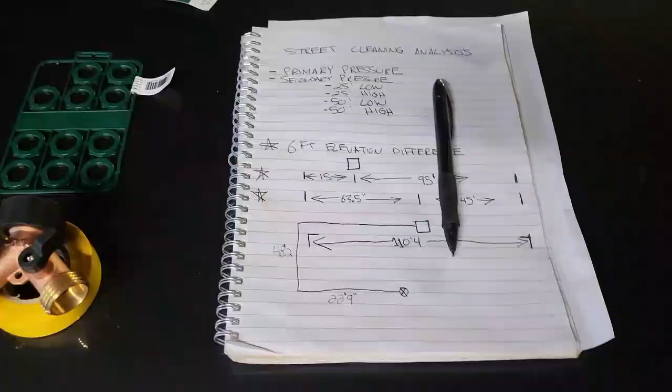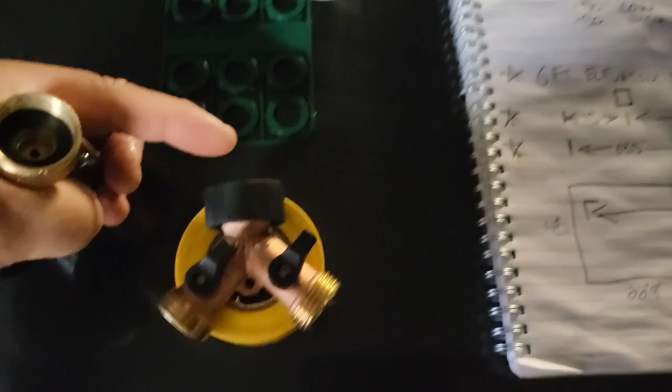Okay, before I start putting everything together, I want to show everybody my garden hoses that I will be using. And as you can see, everybody's probably cringing, saying they're not the right material for a pressure washer and all this and stuff, blah, blah, blah. Carrying on. I bought this gizmo to attach to the garden hoses, which will be connected to the primary. So what will happen is... Oh, that's right. This will be connected right here. This will be free. And then the garden hose will be connected from this to the primary, to the house.

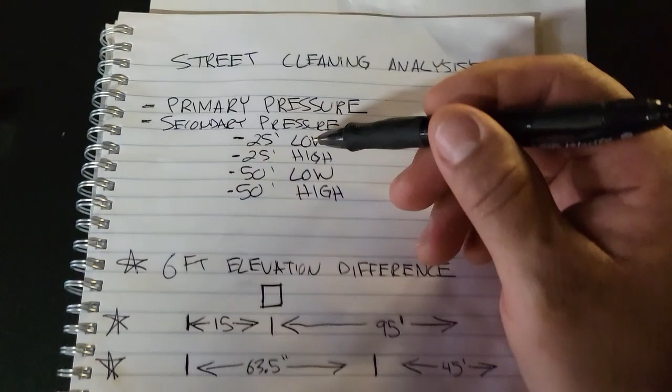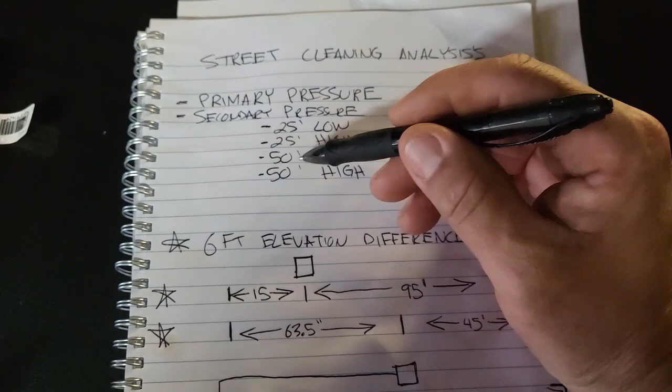Right? And what we're going to do is we're going to take individual readings. So in 25-foot hose for one hose, we're going to put it in the low elevation. Then we're going to put it in the high elevation. We're going to put another garden hose attached to that one, so we have 50 feet in total. And we're going to do the exact same thing. We're going to have 4 readings.

We're also going to do the bucket test of how fast it fills up a bucket. And I don't have any particular way of measuring how much water is in that bucket because there's no tick marks on it. But we do have a tape measure. So we will use our tape measure and we will put it at the top of the water, and we'll take a measurement from the lip right there. And I'm pretty sure we're gonna have different readings.

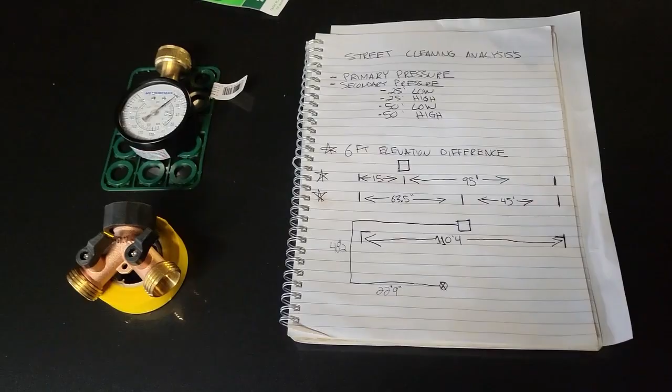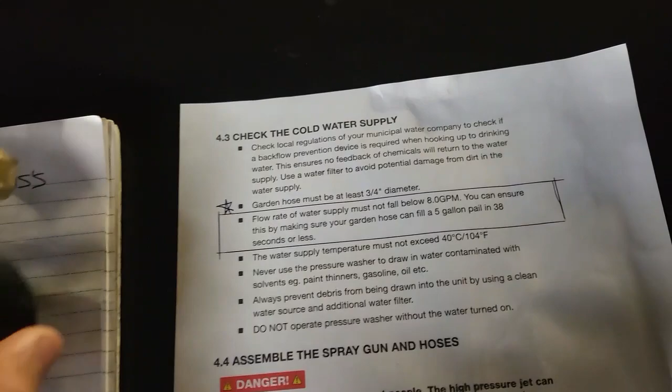Okay, I just went and bought some washers for my garden hoses so that way there's no leaks. So, ladies and gentlemen, having said everything, we're going to put everything into effect right now. So here we go. Before I get started, I wanted to show everybody, see where that star says garden hose must be at least 3/4 in diameter. Okay, so what that means is the garden hose has an inside diameter of 3/4 of an inch. So the water comes through this side to this side is 3/4 of an inch. It does not mean the outside diameter.

And if you look at this here, that inside rubber O-ring is 3/4 of an inch. This part right here is a female end, which is 1.5 inches. And it feeds water through a 3/4 inch diameter tubing of the garden hose. Okay, and the water flowing through those is 3/4 of an inch. Blah blah blah. Let's get to it.

Okay, so now after showing you guys where it is that I'm going to be working, I wanted to show everybody the preparation and planning that I have undertaken to make sure that I have the water pressure needed to feed my pressure washer. So I'm going to show everybody my layout here. I'm going to flip the camera around.

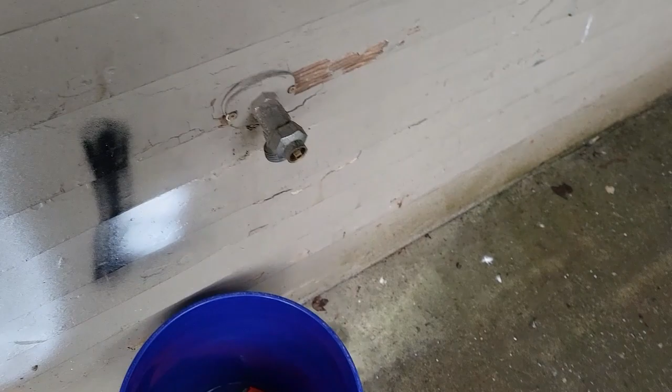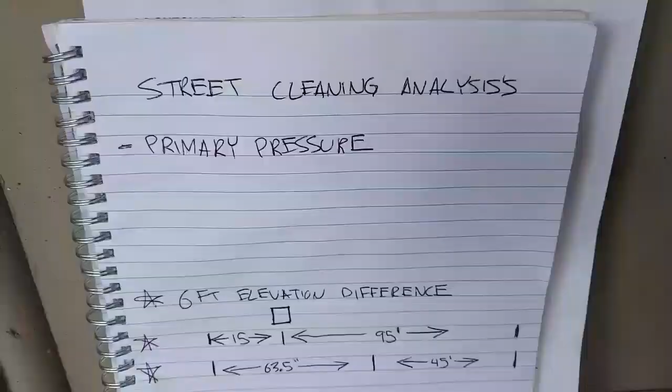As before, you've seen me use this one, this water feed. It does work. Now, I have to feed it from that right there, along here, up this hill, into somewhat the middle of the building. So I want to show you guys some paperwork here. Okay, so this is our layout.

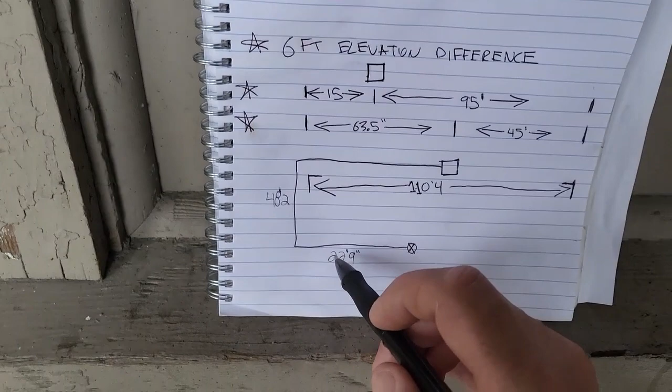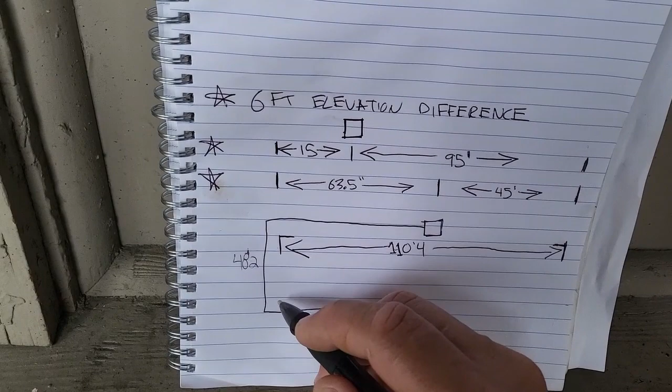On the bottom here, this X represents that hose. It will go a distance of 22'9" to the corner. It goes up the hill a distance of 48'2". Now that does not mean that the corner of the building to this corner is 48'2". That just means the diagonal distance will be traveling 48'2".

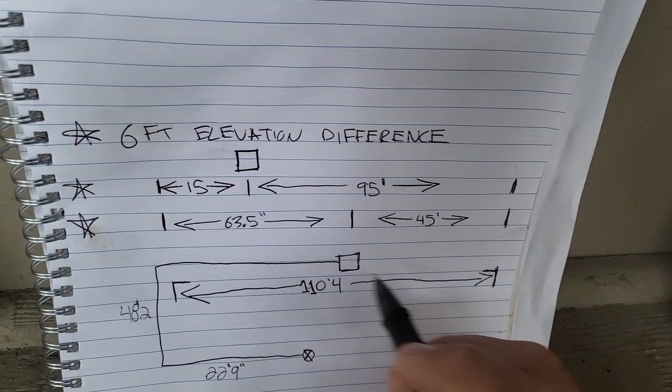Now we have two different measurements here because of the situation that I have. In reality, from this corner to this corner, the distance is 110'4". And a lot of you would say that I would need to put it directly in the middle and use a 50-foot hose so I can comfortably get this and this with a 50-foot hose.

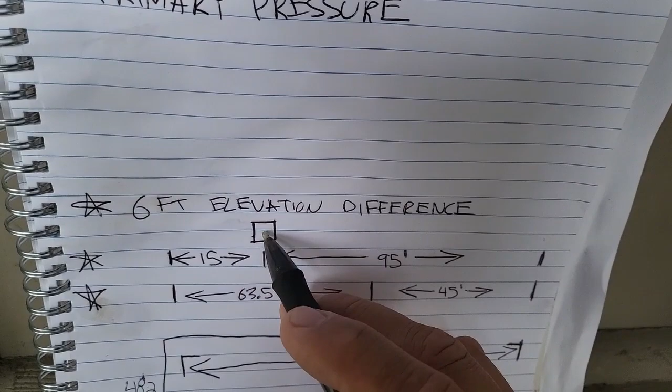So these two drawings, this line represents this corner. This line represents the block here if I was to put my pressure washer there or there, okay? This line represents the other corner of the building. If I was to put my pressure washer here, I would be able to use a 50-foot hose to get up to this corner. All right, and then I would probably just drag this back just so I could get this corner with the hose.

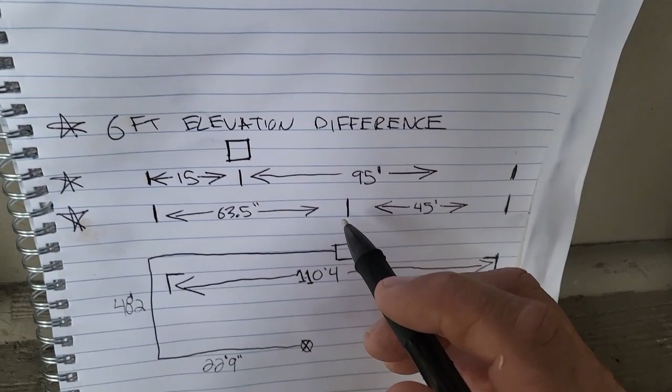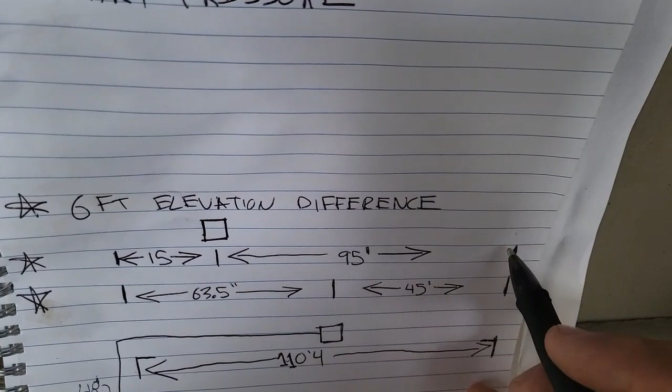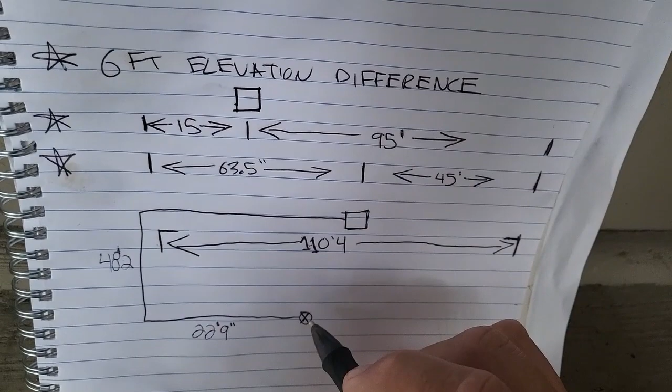But I might be able to have two hoses that are 50 feet each, which means I would have 100 feet of hose, and in which case I would put my pressure washer here, and I could use the full length of the 100-foot hose to reach this corner, which would be 15 feet away, which would mean I would have just a little bit more water pressure from this X, this point right here. Okay, so that's what it is that I'm looking at.

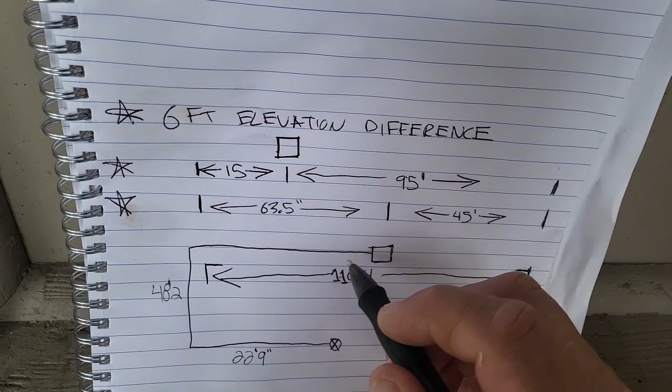We have a 6-foot elevation difference between where this ends up right here and the level surface of the sidewalk where this is. Okay, so now, ladies and gentlemen, what we're going to talk about is water pressure. Let me put this on pause. So from that ShopRite, including the borough, all the way to the alleyway there, that is what I will be working on.

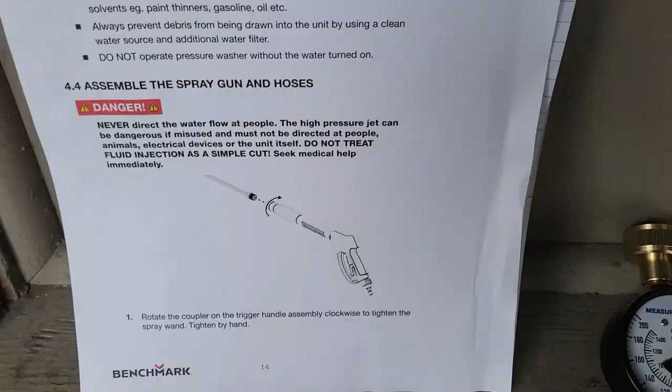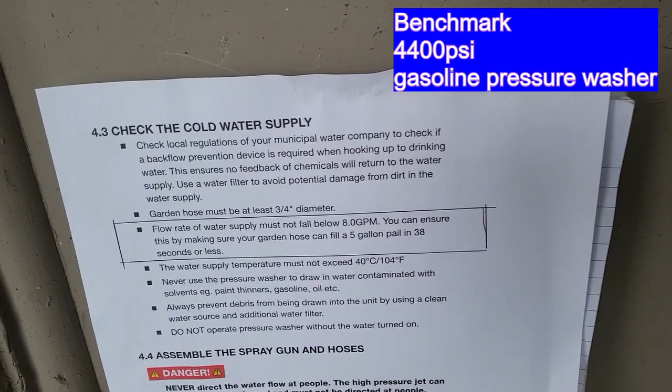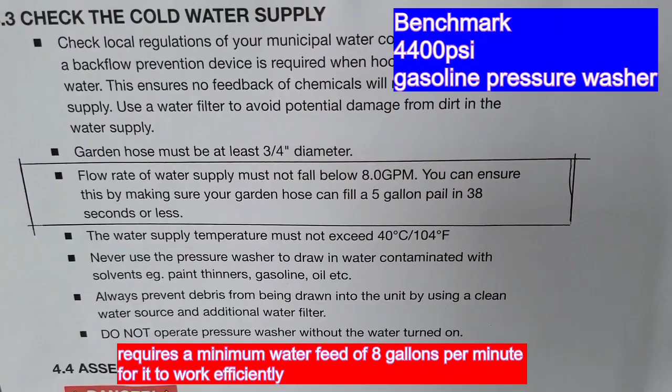Okay, in order for me to know how much water pressure is coming out of here to feed my pressure washer, you all need to know how big my pressure washer is. My pressure washer will be a 4,400 PSI pressure washer, and if you look at this diagram that I printed out for everybody to consider, it tells you your feed. The garden hose must be at least 3/4 inch in diameter, and the flow of water must not be below 8 gallons per minute, and I can fill up a 5-gallon pail in 38 seconds, which is why we have this, an actual 5-gallon pail.

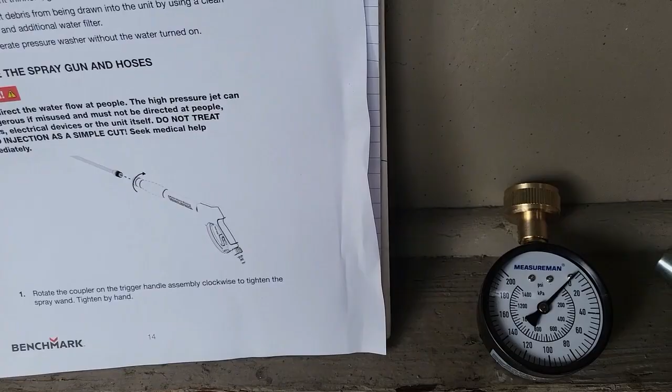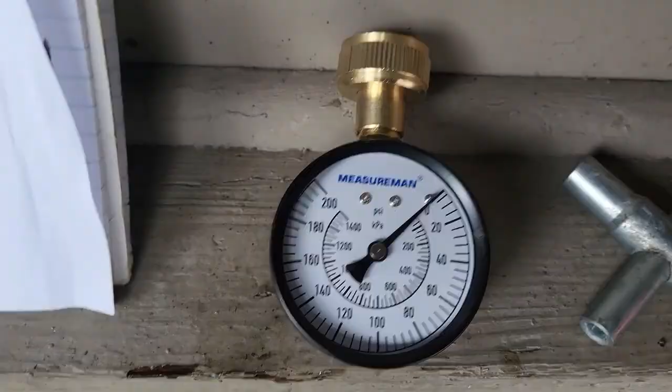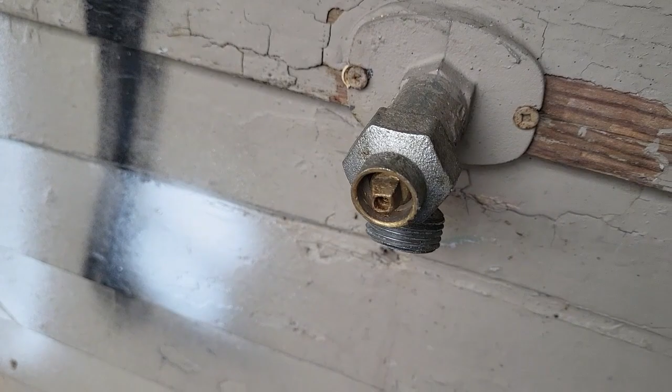Okay, so that's what we're gonna do. We're gonna turn this on, fill that up, and see if we can get it in 38 seconds or less. You see this machine right here? I bought that from Amazon, in fact, so I could check the pressure. And then I'm going to record that, and you're all going to see that. So I'm going to plug this into there. I'm going to use my water key over the little nib right there, and we're going to turn it on and have that reading. So hold on.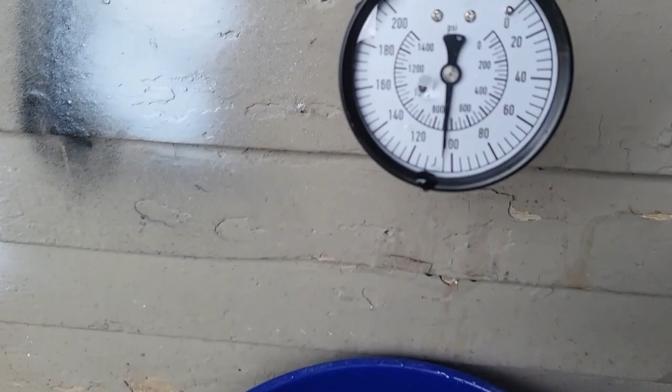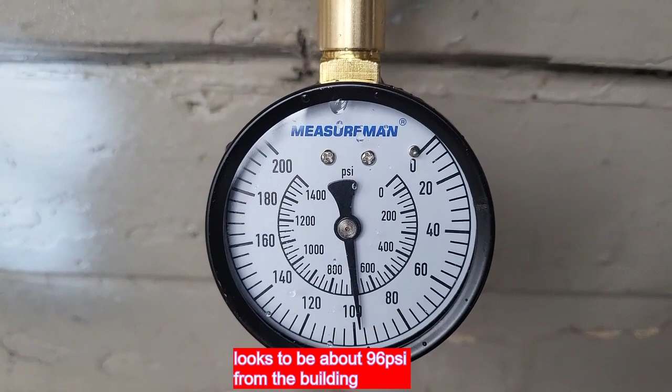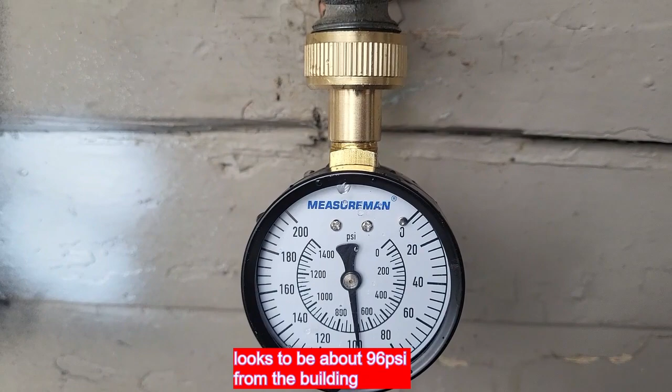Holy effing shit. We have a lot of water pressure there, ladies and gentlemen. Okay, so what I did was I bled that a little bit so there would be no air causing a malfunction with the reading. It should be a solid water pressure, and that's what we have, which means we have a lot. So now I'm going to fill this bucket up to see if we can get that in 38 seconds or less.

I'm about to start. I got my camera dial on video here. I'm going to turn it on full blast. Starting right now.

Okay, that was right there. It was just a little over 38 seconds. It was actually 43, but that's what we have. That's not bad, but according to this, it should be able to fill that in less time. So now what we're gonna do

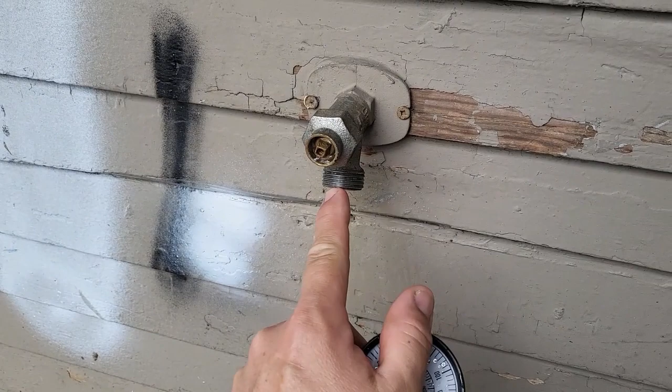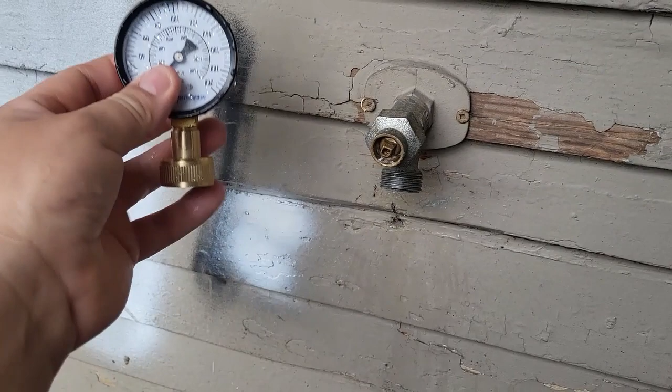is we're gonna put a garden hose from here and connect it to this and see what our reading is. It's gonna be a 50-foot hose. And then we're going to put 2 garden hoses connected to this and then to here, and then we're going to see what the reading is there. Okay, we're going to do 2 different types of readings, and we're going to look at the elevation difference.

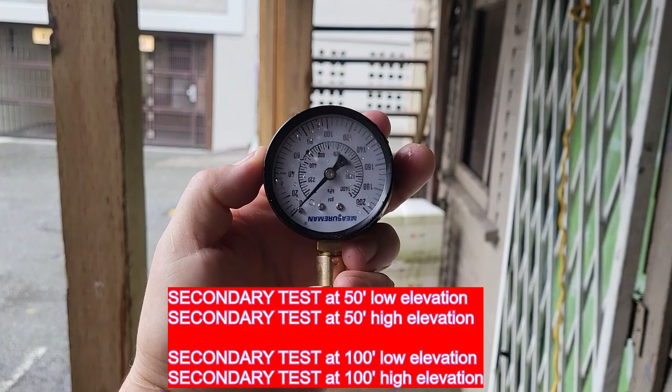So as you can see, the driveway there slopes. You start from uphill here and you go downhill over here. We're going to use both those hoses. We're going to take the reading from over there on 2 separate readings, and then we're going to go uphill and take the 2 separate readings of the garden hoses. And you're going to see that there's going to be different readings, which we're going to record on our paper here. So let me get everything all ready.

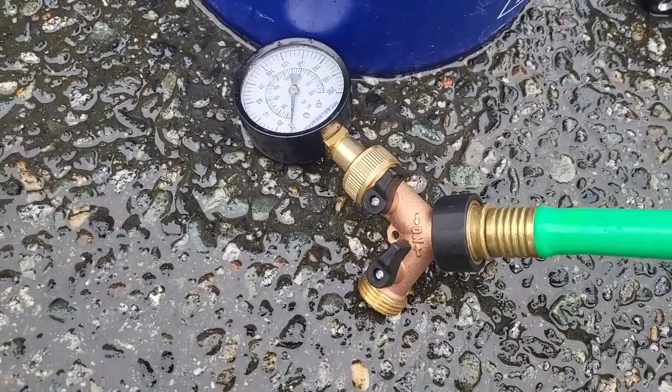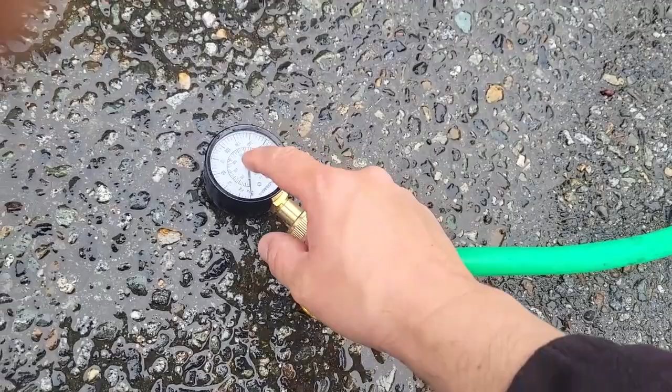Okay, so I'm all set up here. This is the way that's going to be working. This here is locked off. This here is on, which means the water will come on through here, and then I will shut it off here and open it up here, and we will get our reading. So when you are setting up your pressure washer, your hose should have absolutely 0 kinks in it, and it should be as straight as possible.

So what I'm going to do now is I'm going to turn it on, and the water is going to come out through there. When you're doing this, there should be 0 air that is coming out of the hose. It will be sputtering. When you have a complete solid water flow, then you will be able to take a proper reading. There should be 0 air in the hose when you're taking a reading. So I'm going to shut this off.

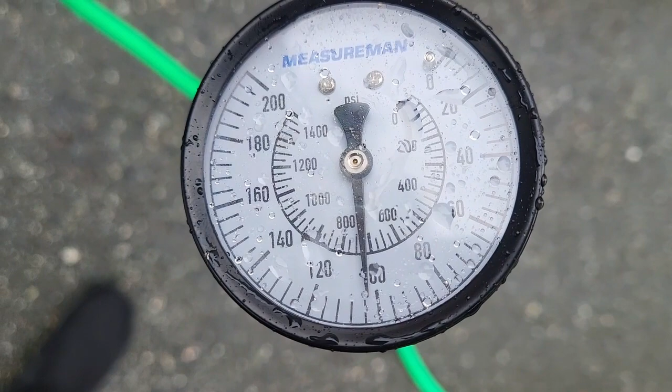Just like that. Then I'm going to turn this on. And there we go. We have a reading upside down of about 100. 110, 105, maybe 105. 2, 4, 6, 8, 10, about 105. Okay? So now what we're going to do is we're going to try to fill this up in the recommended 38 seconds. So here we go. 38 seconds starting now. Hold on.

Six, 7, 8. Okay, there we go. We're gonna take a measurement. Darn it. Okay, so we have a reading of about 4 inches there. Over here, it's about the same. 4. Over there. It's about 4. Okay, so now we're gonna write that down, and then we're gonna do it at a higher elevation.

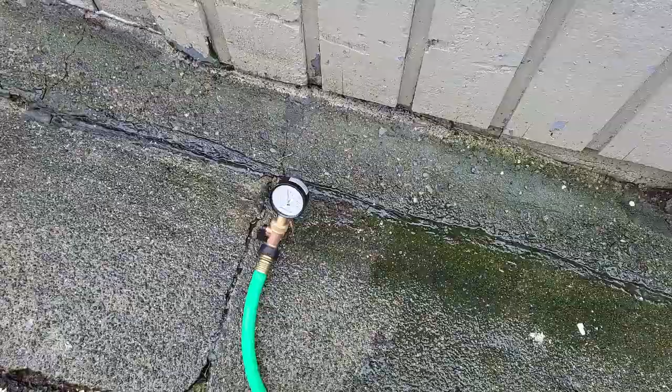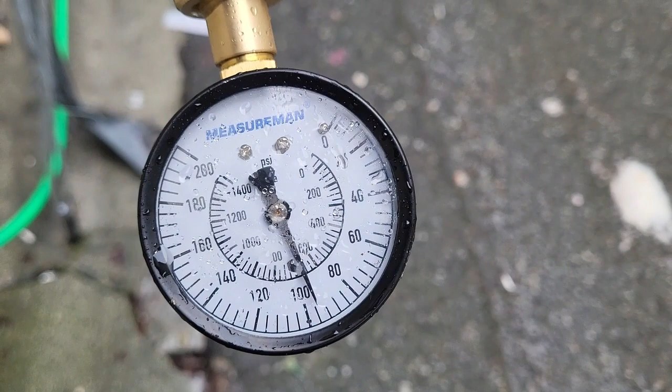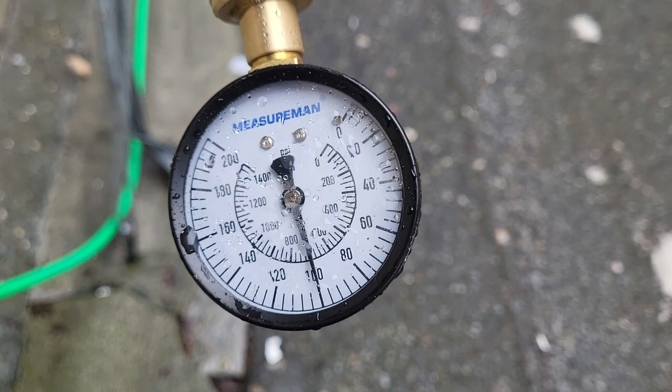Okay, so we're at a higher elevation by about, I would say, 3 feet at this point right here. Okay, and we did drop down a lot, so it's going back and forth there. But as you can see, with a higher elevation, it is no longer 105. Because there are other people in the building that are also using the water pressure at this time, you can see it's gone up a little bit right that second. At 100, just a little bit over, but it's averaging at 100.

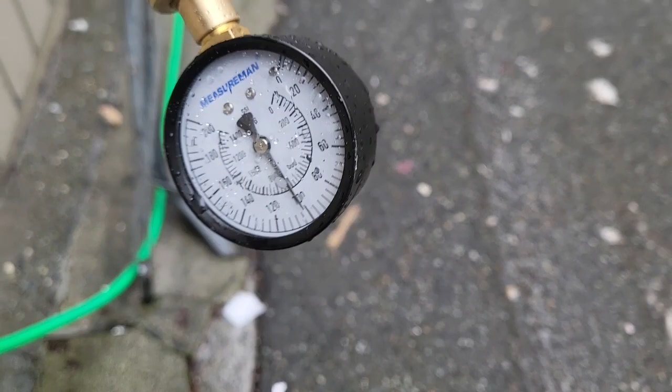So it dropped about 5 psi just by bringing it up in elevation of about 3 feet. So if I was to fill this bucket up in 38 seconds, I'm pretty sure that it would be a lot less. So we're gonna do it anyways. Hold on. 3, 2, 1. 37, 38. Okay, now I'm gonna take a measurement with this bucket on a level surface, because that would be more appropriate, right?

Okay, so we've got a difference here at the lowest point. We've got 3 1/4. Over here we have 3 3/4. So it almost makes me think that it filled up faster right there. So now we're going to attach the other hose and we're going to do the exact same thing.

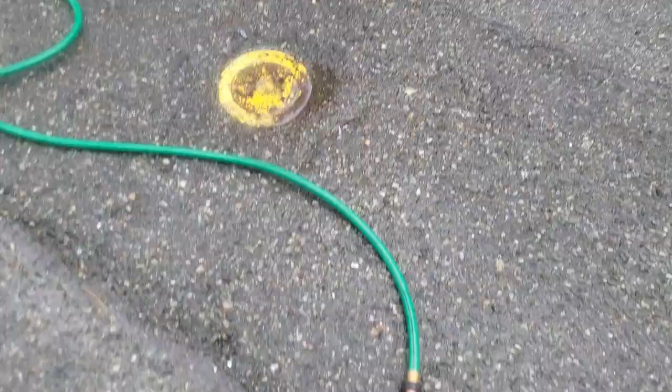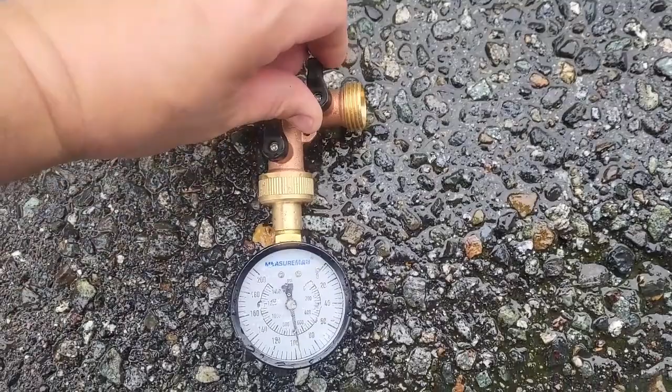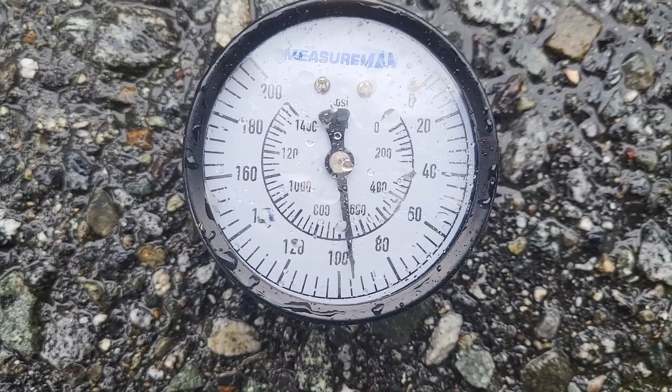Okay, so I have my hoses hooked up. I haven't gone around the front yet, but I will. But I noticed that when I did hook up this hose, well, let me turn this on. See how it drops when it's running? Now when I turn it on, it's pressurizing itself. And it pressurized itself, probably looking at 50 right there, or 60. And now it's gradually going up to 100. But it's not quite going to 100. But it will once it's pressurized.

And if it's going up and up, that means I have zero leaks at any of my connection points, which is good. So now what I'm going to do is bring this all the way up around the front of the building to see where exactly the end of this is going to be when I do the pressure washing. And we're going to take the reading of it too.

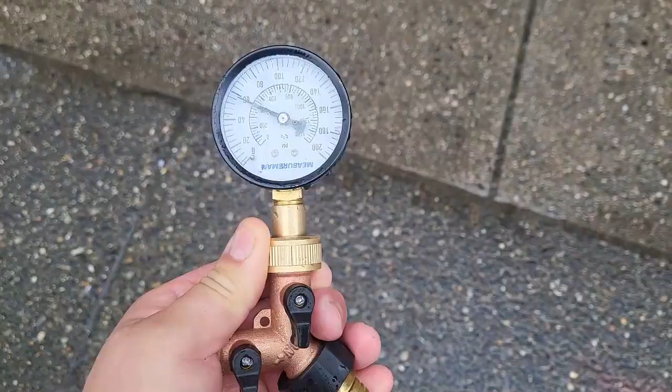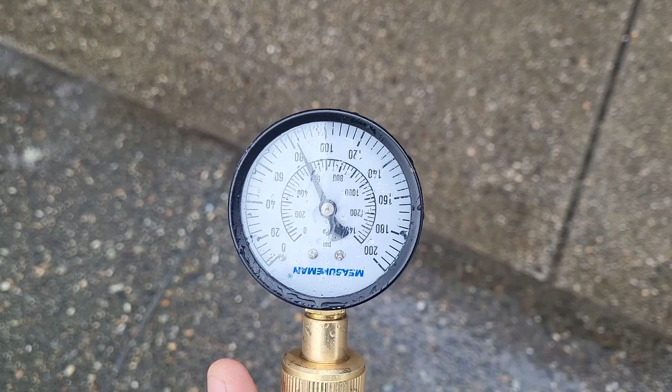Okay, so this is what my reading is. It is not even close to 100. And I have a slight hole in my hose, which is not helping. But if we were to take into consideration that everybody's using the building, all the water, this is where we're at. You see how that needle is going up and down? There's other people using the water. Okay, so now we're going to fill up a bucket at this point right here to see what our reading is.

Three, 2, 1. Okay, so now we take a measurement, and as you can tell, it is way less. After 38 seconds, we were able to get it 8 inches. See that? 8 inches. That is like half. Okay, so I'm going to record that. And now we're going to do the lower elevation.

Okay, so here we are, about 100 feet away. I just realized that this is 50-foot hose and not 25, which is why I was able to make it in front of the building. So I bled it from right here. Now I'm about to turn it on. So it starts at about 44, and then it gradually increases. And as I just noticed, I have another hole all the way up there.

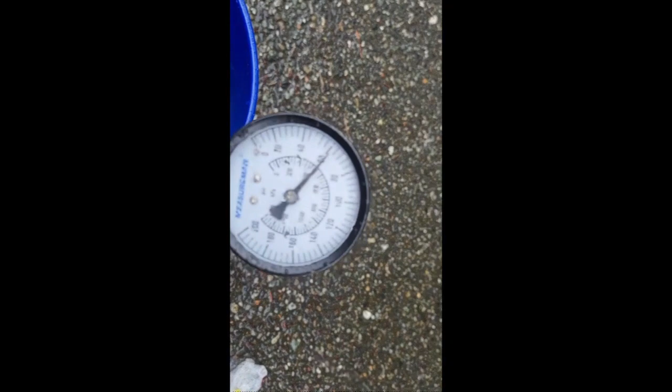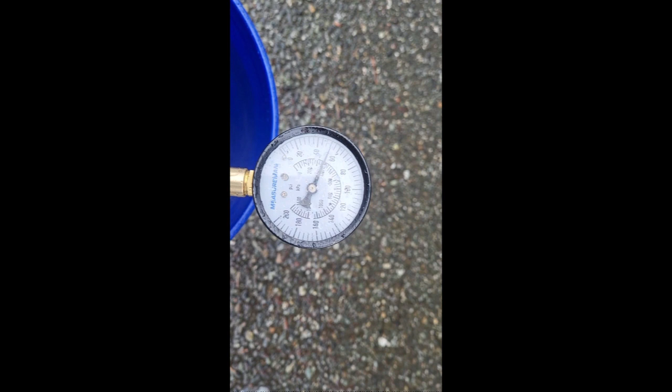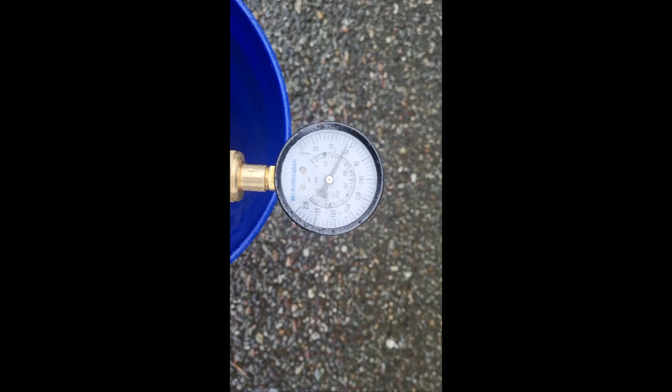The holes that are in your hoses affect the pressure, and right there is 60. At a lower elevation it has 60, but there could be other people using it inside the building. But here we have a steady 60. It may not increase to 100, but this is what we have after about 100 feet of hose. And now that I think about it, I really got to measure my hoses because they're probably not labeled on there. Now we're going to do the full water bucket test.

Three, 2, 1. As you can tell, we got another half a bucket. After that long a length of distance, we have half a bucket, which to some of you would probably not be surprising, but now we're going to measure it.

Okay, our last measurement for this experiment. It's touching the water, and it is at just a little over 8 inches. Just a little over 8 inches, by at least 1/4 of an inch. And I would attribute that to gravity. Gravity is helping the water flow downwards and down a hill. And gravity would also be acting against it going up a hill. Now we're going to go inside and talk about this.